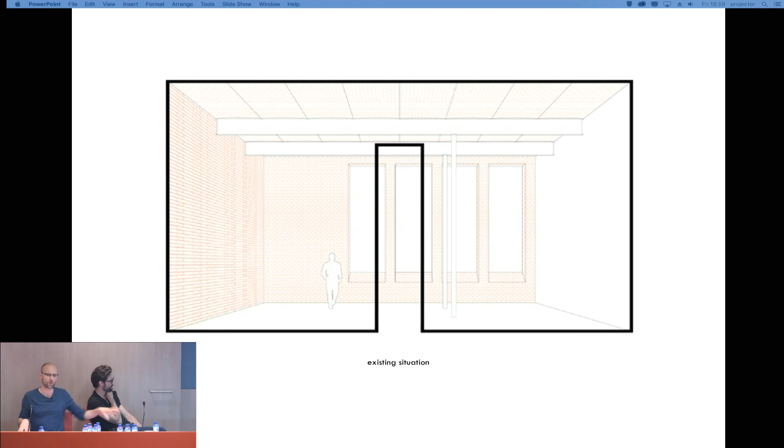That's our opinion. What we believe our job is, is to combine whatever they are asking with the qualities and downsides of this plot. So in this case, the search was how we can combine this way too complex or dense program into this loft without killing it.

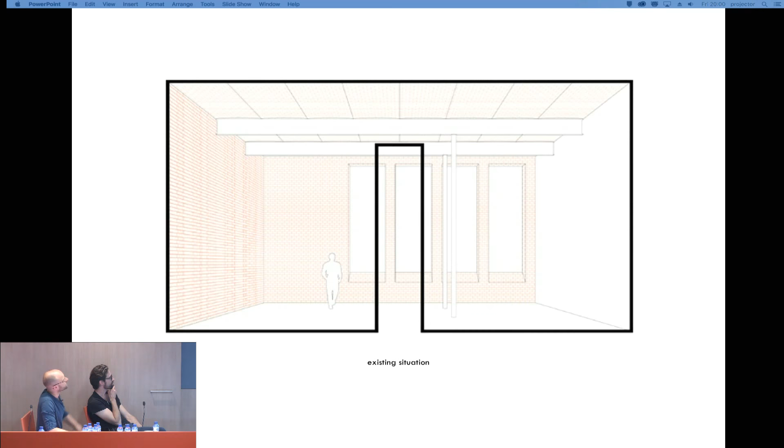So this is actually the scheme of when we were designing what we wanted to do with it. On the previous pictures you see the nice windows we have, they are only on one side. All the rest of the rooms are blind. So it's even worse than a row house. In a row house you at least have some light at the beginning and light at the back. In this case you just have light on one side.

So if you imagine the windows, this is the plan, the windows are at the bottom side. We decided to move all the closed rooms to the walls to let the light enter the open space. So we designed it as if we would design a patio woning, a patio house. Is patio English? Is it Spanish? Okay.

So this is what you actually see. What we did is we did not touch the windows. We made open space in the interior as if it were a garden or something like that. And then we pushed all the necessary closed spaces to the walls.

By doing so, we did not touch any of the columns, which would be very logical to use because we have 2 floors. Every other loft immediately used the columns, bolted some extra steel against it and used it to do the floors. We decided, no, we did not want to do it. We want to show the ceiling, we want to show the columns.

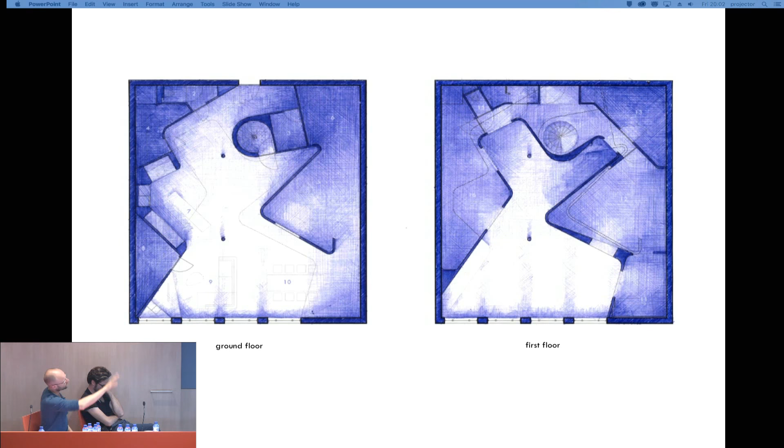And then everything else, the toilets, the kitchen, the storage is on the side. The other side you have the office, you have fitness he wanted. And then above you have on the right side the master bedroom with a bathroom, and on the left side the kids' room with another bathroom.

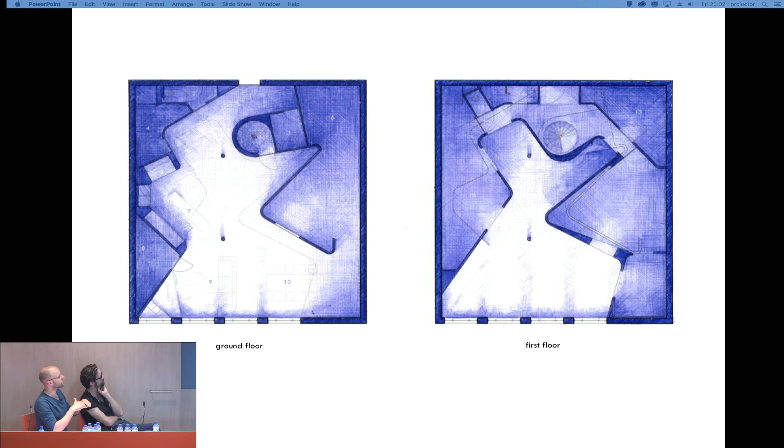So here you see on the above, the first floor is really coming together, but it's no problem because the light enters, and because of the curved walls, it's like a curtain that we put in there. The light becomes shadow, becomes light again, becomes shadow again. But you still see the old structure.

Originally, we wanted to keep all the old elements, red brick and the steel, just the steel color. But the client really loved the white, unfortunately, so he painted everything white. But luckily, we said then, okay, but then we have to find a new contrast. And then he was willing to search with us for a material we could use for the walls.

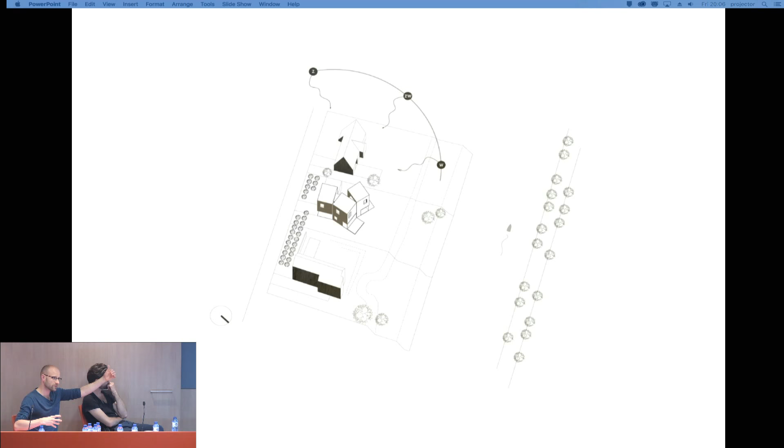The downside of this expensive plot is that the client also wanted quite a big house. So he wanted 5 bedrooms, for instance, on the first floor. But the plot is not that big. So our problem was, how do we manage this massive block of square meters? How do we break it open? And how do we let the light enter?

So again, there's a nice balance between open space and closed space. So because of the view at the back, we wanted to position as much of the living spaces to the end, to have this nice view. But the downside of this plot was also that the sun was at the left side, and the front and the left.

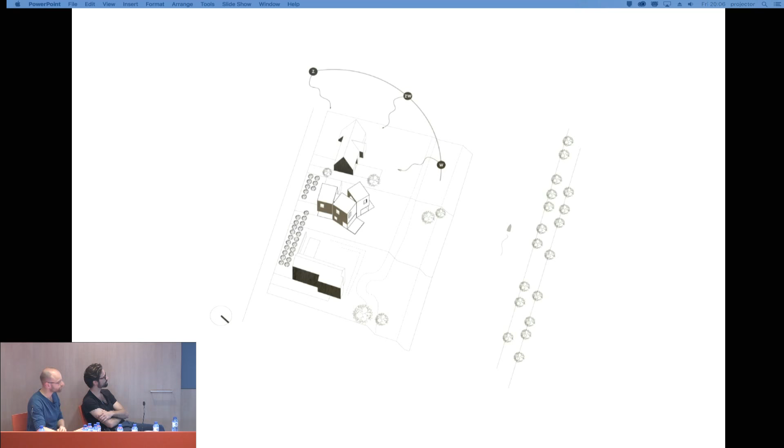So if you would be sitting at the back of the house looking towards the wetlands, and you would not have any sunlight. So what we did, we made a very monolithic volume on 3 sides.

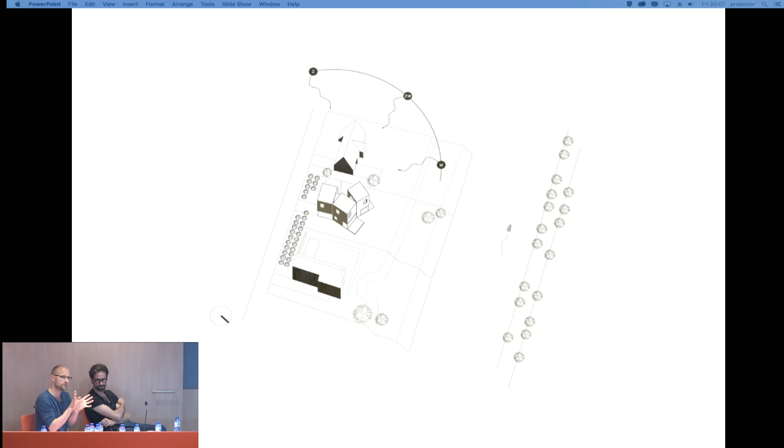Almost feels like a castle, strong, very protective for its inhabitants. But then on the other side of the house, it opens like a flower blossom would open to the sun.

So there you see on the side of the sun, you have these incisions. Again, in the previous design, it was more of a gentle gesture. Here it's been cracked open. But these cracks let the sunlight, the direct sunlight at midday, enter the house.

What we like about these kind of studies is that people see our projects without the plans. They think like, oh, if we build with Graux and Baeyens, everything's going to be crooked and everything. All walls, there's no wall will be straight or anything like that. But if we show them the plan, they understand what game we are playing.

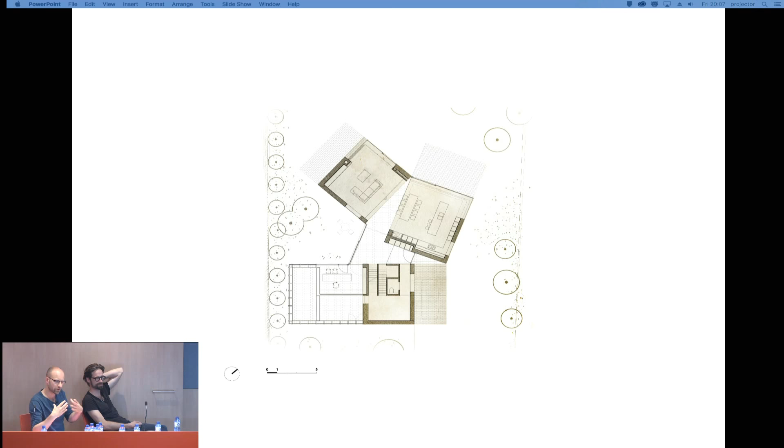All of our rooms are actually very straightforward, very logical to design, but it's only the spaces in between. It's the circulation that's been in a strange angle. So there's no problem for will the bed of my kid fit in his room? Of course it will. And will I be able to put any closets? Yes, of course. So these are the renderings from the patio on the left side.

The first image is what you would see if you enter the house and the light is coming towards you. The materialization shows that the 3 brick volumes continue to the ground. We also use the outside brick on the inside because we really wanted to feel that you are moving in between those 3 massive volumes.

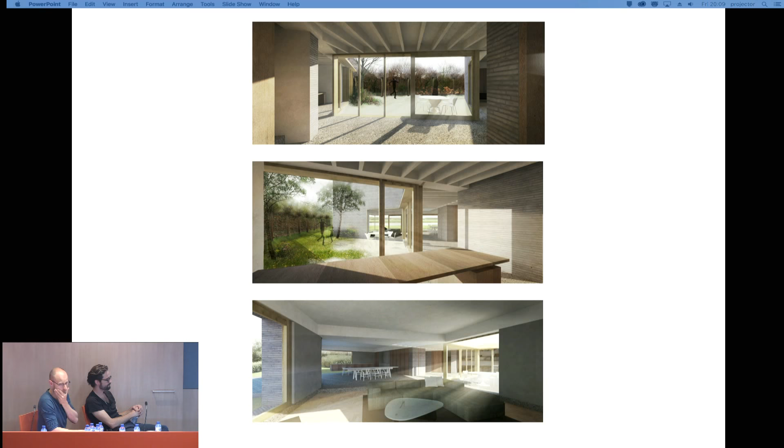But the black volume, which you'll see in the pictures, the volume that is in between, is a very light structure with a wooden structure. We also use this structure to give some sort of direction into the ceiling.

So you see the brick volume coming through down, and then the black very small volume, very light. So the front of the house is the right picture with the entrance, because the owner also wanted a place to put his car. Very closed, not giving away any of the privacy. But then the other side is really open to the landscape.

And then in these joints where the light enters, you see that there's... here you see that the light enters through a skylight, so you have your view to the back, but the light is coming from behind you.

This is just a detail of these 3 volumes. They are not actually touching each other. They are 5 centimeters apart from each other. So once every day, when the sun goes through the glass, it goes through the other glass, and then it goes through the building, and you have this really thin line.

And then Basile and I are looking, look how cool, nobody else noticed, but we are really happy with that line. But we believe that this thin line makes a difference if you are standing outside of the house, especially because it is so massive. It needs this kind of little detailing, a little bit of poetry inside.

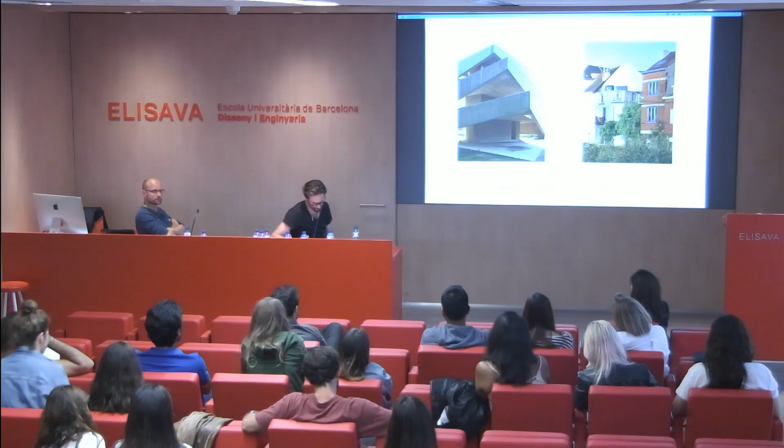Because most of the buildings we make are private buildings, and you have to be invited to go inside, it's a choice what you do with it, starting from the kind of brief you get or the kind of building you get, whether it's a new construction or not. So this is the topic, and the first project is the new one.

So here you see already a picture of this pretty expressive building. What we liked about it, what it combined for us, was that it's, in the first place, the protection. The skin is the protection for us in the first place, against everything. Then it has a concept that I will explain later. It also involves the stability of the house. What you see is actually the bearing structure of this house, and also its expression.

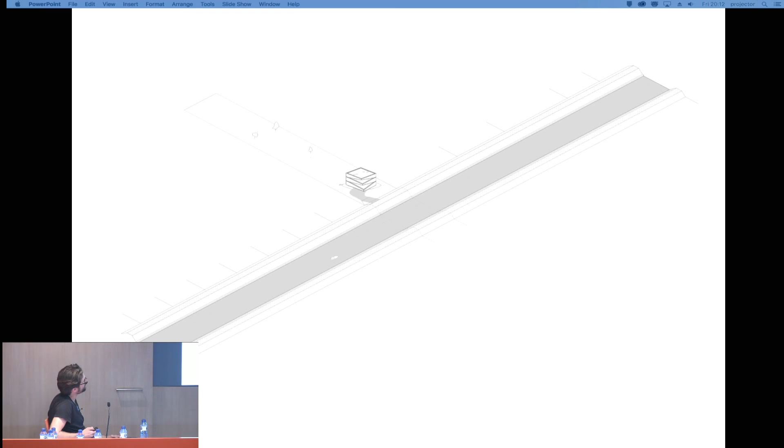So the house is located along the water, like you see. It's along a canal, straightforward. It connects two major cities in Belgium, and the plot is pretty long. The choice of building it there was not ours, it was obliged. But it was important because we wanted to obtain the views on the water and the wet fields also in front of it.

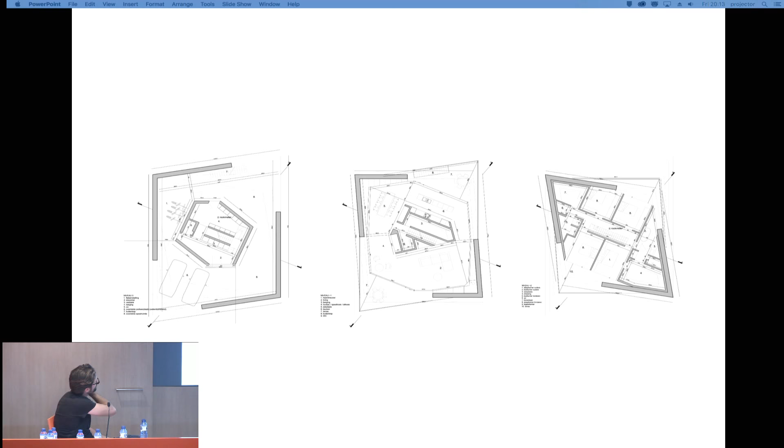The ground floor, here actually you can - it's what I told you before, but the concept is already in there. So what we wanted to do is pretty simple: you want to create vistas, to frame the views.

In the front we have the beautiful waterfronts and the fields, and on the back the trees and the garden. So how are you going to frame it and at the same time get privacy towards your neighbors? So, and the intimacy that a house needs towards the openness.

So on the first floor we have terraces, and the whole walls open up from very close in the corners, open up towards these terraces. So it's filtering the light to the more intimate parts, and the central core - that's the staircase and the practical zones - divides actually the whole rooms. This one open space gets then a bigger living space and a smaller dining space, and so forth.

On top we have a lot of bedrooms, so it's a whole different approach how we divided it.

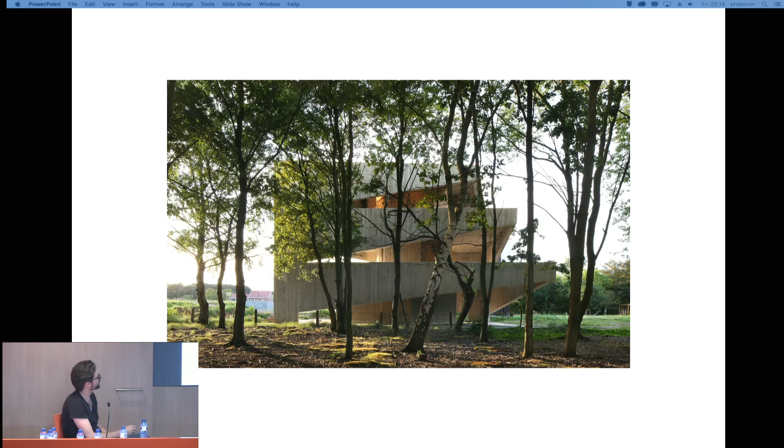Here you see how the light is getting in, and we chose already in the construction to take pictures, because there you have already the whole concept mixed. Everything is there. So there's no addition that you have to do except the windows to get your protection against the weather, but everything is already there.

The choice of using concrete was pretty obvious. It's the most effective way to make the whole structure stand. So it's a 30 centimeter wall, reinforced concrete, a lot of reinforcement. Everything is carried down to these two columns that are stacked on top of each other. I mean the building layers, and the core of the house gives the stability of it all.

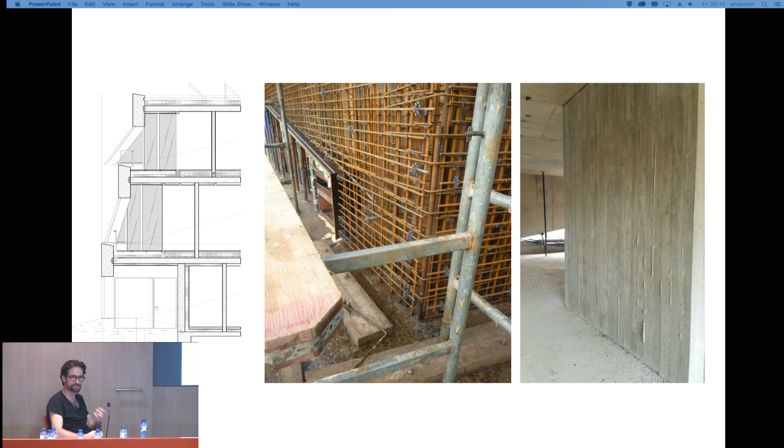We chose to work with wooden planks, that we just divided, or the position in between is just one nail. And the nail, when you pour the concrete the right way, it goes in between these planks and gives some strange, nice features like this. And when the light touches it, it really gets very tactile. So you have a really robust, strong building, but at the same time you want to touch it. It's really a tactile thing. And here in the sun, you see how the light's playing with it.

Here you already see the line of where the glass will be. I think it's here, yeah. And the division with the central core of the separate rooms inside the main plan.

This is how it looks today. Polished concrete with a little bit of sand color in it, and lime plaster also, getting a little bit more rough, so we have to insulate the whole building. The building regulations at that point are very strict in Belgium, so it's 20 centimeters of EPS that we used, and it's all plastered. But once you get the different layers on it, it's really subtle, it's different. It's not like a traditional plaster, it's more ductile, more colorful, deeper.

And here, the openness, the framing of the lights and the views. The terraces. All materials are natural materials - wood, steel, galvanized steel, really pretty rough materials.

Hopefully, normally the provisions are that in August they're gonna move, so it will be finished. It's already a project we worked on for 4 years. In the beginning we couldn't build it, it was not allowed, so we went higher and higher in the hierarchy of the city halls, and at the end it was allowed to build it. The neighbors started 2 years after us, and will finish before us, but yeah, this is how it looks.

Next project is completely different. It's a row house, actually more a corner house, 19th century building. It's a generic building. Here, all the cities in Ghent have a sort of belt around the medieval city from the 19th century, all small houses. They have like 4 or 5 typologies of houses, smaller and something bigger, but they all look like that.

Usually people are not interested in buying corner houses because they have no garden, but the reason why I bought it is this - it's a fantastic view, 200-300 meters of water in front of it. The west side is actually the old harbor of Ghent. The boatmen, old boatmen who are in pension, still live there. It's a real piece of, how you say, there's no gentrification yet in this kind of neighborhood.

It starts now, but at that time it wasn't. It was really nice to do some project there. So the fabric of the city gets really interesting because it's located on a corner. You have a small street too, which is completely different from the big views you have here.

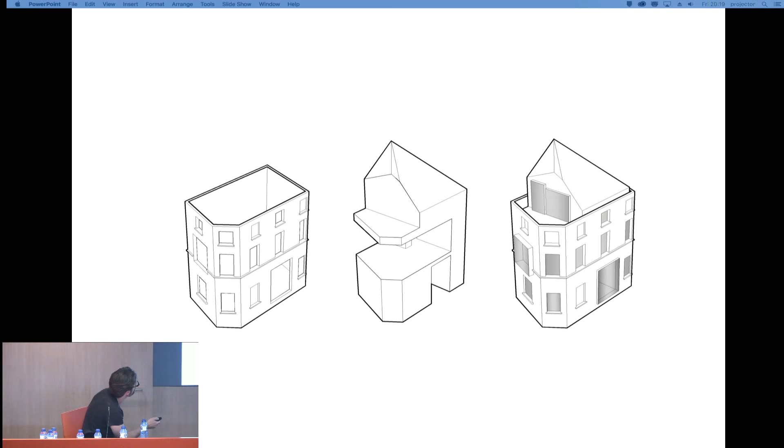So the question was, how can we play with this historical membrane we have, the skin, and do the alteration we want to do with a lot of respect for it. So the basic concept was to keep this membrane and empty it. The only thing we kept that was interesting was a staircase and the A-shaped beams in the roof. And we added new volumes, closed volumes.

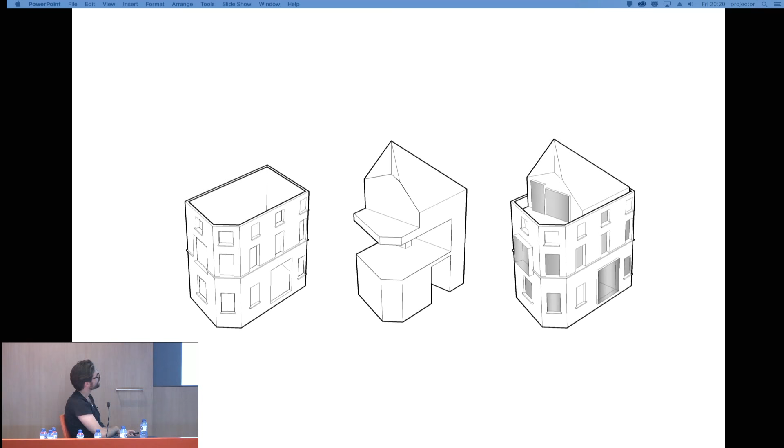And actually you have to wander through these volumes to get where you need to go, and then you stack everything together. The plan - we turned everything upside down.

Ground floor are the bedrooms - there was the least amount of light, so we kept the bedrooms there. There's also a tram passing by, so sometimes when there are 2 or 3 of them stopping, they are standing in front of it, so that's why everybody in the street has curtains, because you have 40 people watching in your living room. So by putting your living room on top, you have much more light and you don't need any curtains.

It's a beautiful view. So the living space is on the first floor with the bathroom, and then here we have the kitchen combined with a terrace.

A view from the garden of the neighbor towards the small streets, and this is one of these incisions we made. A big window, and in the front, same thing. These are the only two things we did, and the plaster just fell off during the construction.

But from the other side, you have a framed view on a sort of garden. We just received a picture today via Facebook. This was a house that was bombed in '45, the garden, and never rebuilt. When you pass there, you don't notice this garden. It's sort of a small fabric in the city, and everybody ignores it. But when you frame it, it starts to have another level to it. Something ugly can become something beautiful because you focus on it. And then all the flowers and plants are there as the seasons change, and it really becomes a picture.

Once you go up, one of these volumes blocks your view, but the light is filtering through, so it attracts you to go have a look. And that's when you turn around on the right side to enter the living room. And this is what you get: small space, not so big, but through these windows and the light, it's really pulling you there.

This canvas always worked really well. I lived there myself, and it was a fantastic place to live in. You had a lot of intimacy, because also the colors we played with, but a beautiful view on the water, and everybody had the intention to walk towards this canvas and step into it.

It's not by coincidence there's a little step towards it, because it creates a sort of dynamic, an extra—really, making the step gives you another feeling of how you get into something. And it's also used when a lot of people sit down. My son was playing here always with his toys, or you can read a book.

And then on top, also the choice of keeping this facade. A lot of people asked, why didn't you tear it down so you have a panoramic view? But that's just the whole interesting point. From here you have these old windows that frame again the same view you have, but on a different level.

And something that's not on the picture—on the left, it's a really small one, and you go look behind all the buildings that are made in Belgium. Typical: you have the main house, and then everybody builds some crappy thing on the back of it. And it's really, actually, it starts to be beautiful when you watch it.

And some shots to show what the house was like. There was the original A-shape. The terrace was—the form of the house was kept. Just by slicing one piece of it, you get an interesting terrace and an interesting visual shape of the house from the outside, but actually it's nothing special about it—it's just slicing one piece of it.

Kitchen block, a bathroom, and the two bedrooms. My son's bedroom was really small, 7 square meters, but he always used the entrance room as a sort of extra room to play. So the entrance, the hallway, is becoming more than just a practical thing.

Then the two next projects are titled Strangeness versus Familiarity.

These projects are really similar for us, although they look very different. The left one is new construction again, and the right one is a reconversion or refurbishment with extension.

The client's brief was really interesting. He said, I want a normal house, nothing special, except that I want all the places, all the functions to be separated, but still together. We didn't quite get what he meant at first. How are you going to do that? Either you work in an open space like a loft, or you work everything separate with doors like they did before. So that triggered us to think about what we could do.

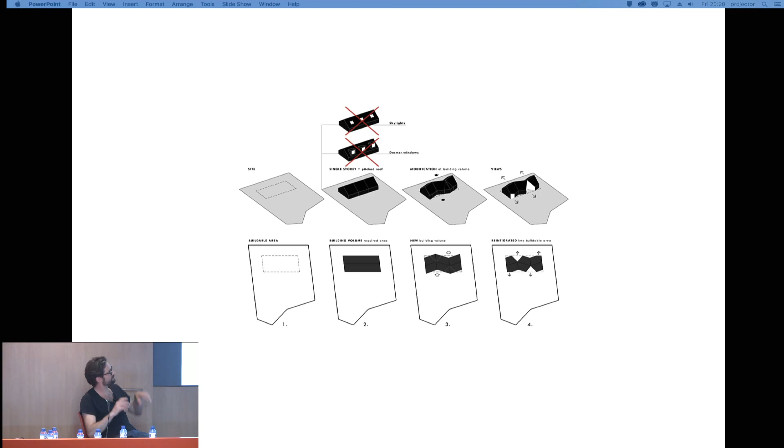So the challenge was how to get all these separate, open rooms and still bring in light without the traditional way of doing it. We thought a lot about this, and the idea came when we started to fold it a little bit, and especially when we made two incisions on both sides of the facade, letting light come into the whole building. This is actually the frame, the backbone of the house.

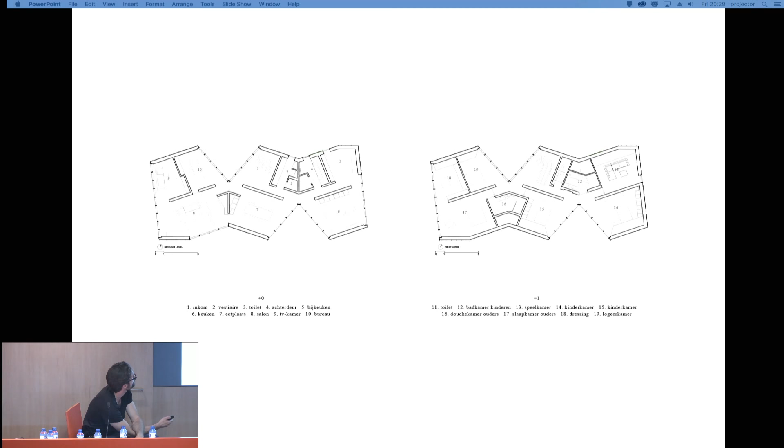We're really proud of this plan because it incorporates a lot of what we do. All the rooms are actually completely separate from each other, but through these openings you get a diagonal view from one side of the house to the other, left to right, internally too. Every room can be separated by sliding doors that disappear, but it's very dynamic. This is the reality of the plan.

By making a symmetrical building, you actually have no back and no front, but the environment is different. So the interaction between your environment and your building is completely different, even though the facades are the same.

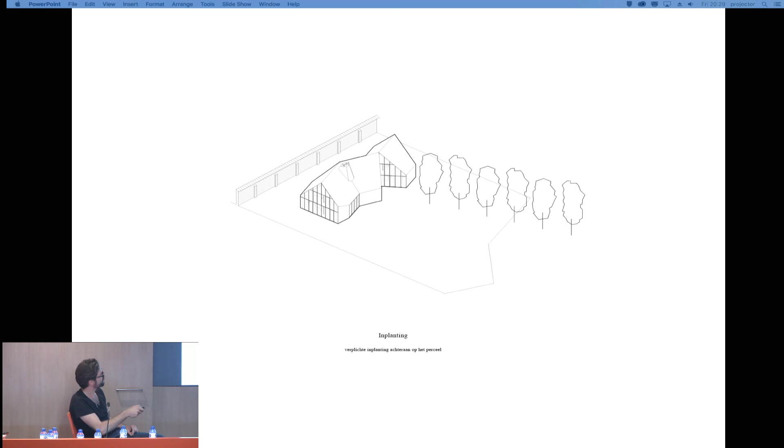The building was obliged to be built at the back, and we couldn't make any hole in the wall facing the street, so we had to enter from the front, but then decided to place the entrance at the back instead. Here's a picture of what we couldn't do.

It actually looks like a really modern building with modern materials, but on the other hand it's really familiar because it's based on the archetype we all know.

It's really hard to photograph. We seem to make architecture that's really difficult to capture in photos. Like most architecture or interior architecture, you really have to be there to feel it.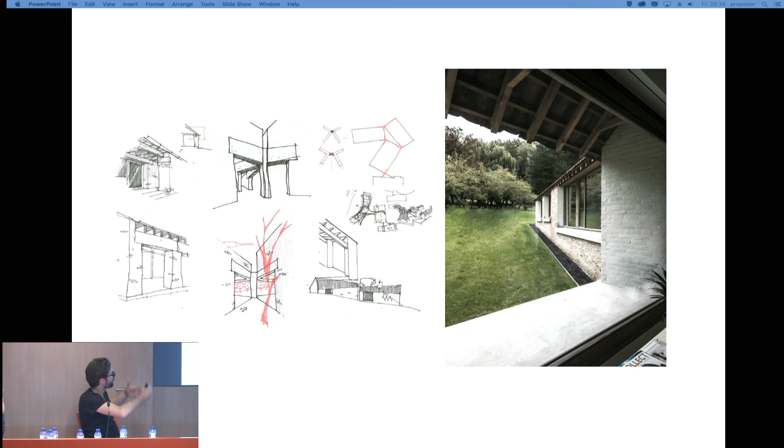Possibilities of how to connect everything to each other, sort of a patio, how two buildings do not touch, like the 5 centimeters Koen talked about, but then more, and how it's going to be supported. So these were all the ingredients we played with.

And this was the final organigram, how you'd say it. So we have an eating house, a sleeping house, and a day house. But what's most important is what happens in between the volumes, not what's happening there, because this is a cluster of buildings. That idea of clustering and adding more, it's like making a little village.

But in between these houses are squares. Sometimes you can make a garden feeling like it was here. We didn't touch anything, there was no real design of the garden necessary.

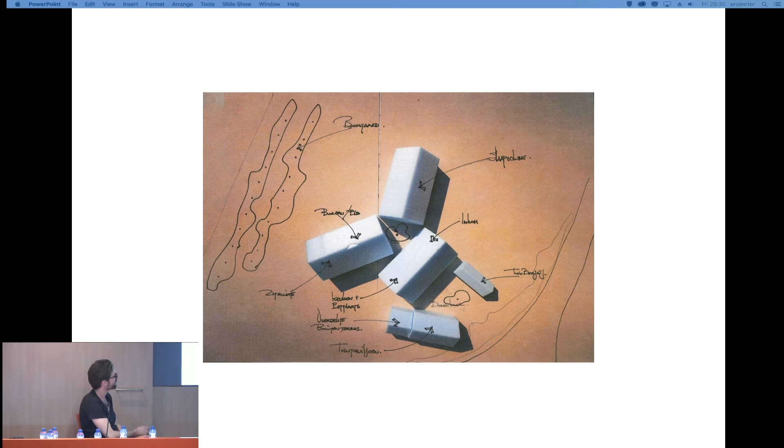Here it's going to be more, it's a south. We designed something to it, sort of big terraces, and this is more like the old farm felt. Just the only thing it needed was one tree in the middle, and it worked perfectly.

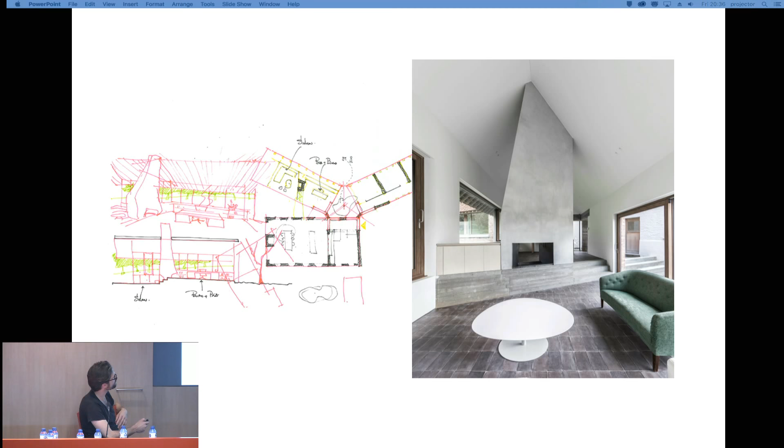And there's the connection between the eating, the former house with this, and the bedrooms. This is the former house, or the eating house we call it, with the A-shaped beams, the original ones.

And all the materials we use refer to this - it's a Spanish floor. All the tiles are really different, they go from 29 centimeters to 31 centimeters. So they all had to be selected so that the rows could be made without having one sticking out over the other.

And the final plan, the technical plan, with here the result of it.

So first, people and friends and architects asked us when they saw that, are you changing style? Are you doing something else, old buildings or something? But for us, this is as contemporary as the one before. It's not the materials that determine if something is contemporary, it's the way you play with light, with the rooms, with the interaction of rooms.

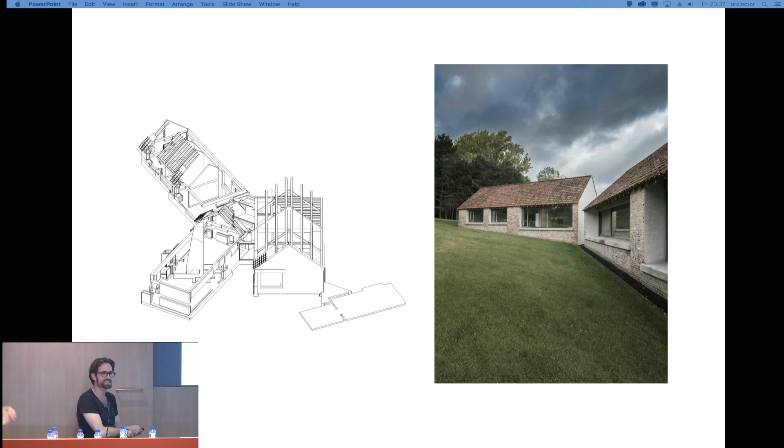We made some 3D technical drawings, so we have no cold bridges and stuff like that, so it was really complex to make something look simple. We always compare it with dancing - when it looks easy to dance, it must be very difficult.

These next two projects are two new houses we are doing in the city tissue. Things are changing a bit for the moment in Belgium because they are changing the laws and trying to stop new lands being developed. There will be a concrete stop, as they call it, in 2040, which means all the nice plots for nice houses are finished. We don't mind it because, as they say, Belgium is already fully built, and it's quite true.

But the interesting part is that now people are looking towards all the leftover places in the cities to build a house. So you get these really strange plots where nobody else before thought of putting a house, now being sold as plots to build on. What we like about that is that you really have to be creative to use these shitty plots and make something really cool out of it.

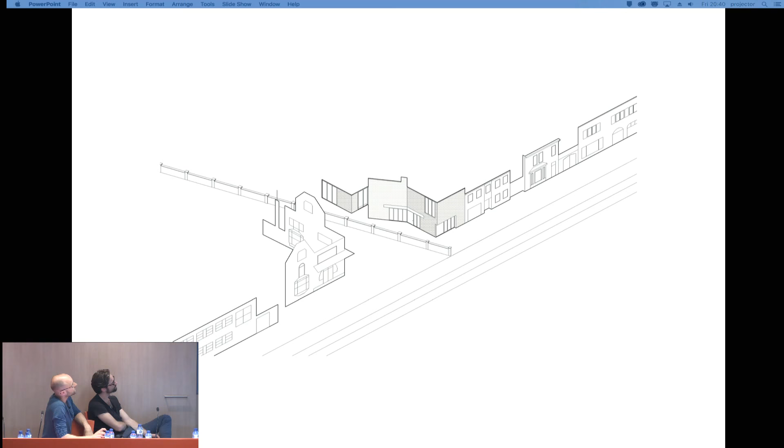So we had to come up with a design. We found it important to give an answer to this very strange situation. We did not want to make yet another row house. We wanted to make a facade that could continue what's happening in between those two buildings.

So what we decided to do was, since it's all one facade next to another, continue this story and pull it inwards into our plot. Like that, we made a sort of dialogue with the other house standing next to it.

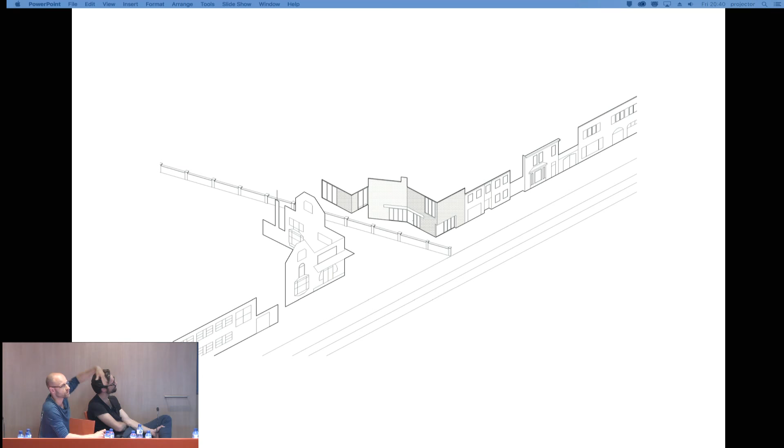A very important reason for us to make this kind of architecture was also the sunlight. The sunlight was at the side of the house and at the back of the house, so we needed this facade to put in the windows.

So here you actually feel the narrowness. We only have 3 meters between our building and the wall dividing the two plots. But this wall, which is an old element, we really appreciate it. For us, it doesn't have to be something modern in aluminium or black or whatever, we can appreciate this kind of wall.

Especially if you combine it with the curtain again we made in brick, something cool is happening. 3 meters is really too narrow to put a wall next to another wall, but because of the tilted movement we made, something interesting starts to happen.

Again, all the crooked lines are very logical once you see the plan, because what we are doing is connecting 3 identical square volumes, connecting them at the corners and breaking open the volume like that.

So in the first volume we have the office of the client, who is a landscape architect. Here is his office, this is the dining room, this is the living room, and here is the kitchen. And then this V shape is again a patio to put a tree and let the light in.

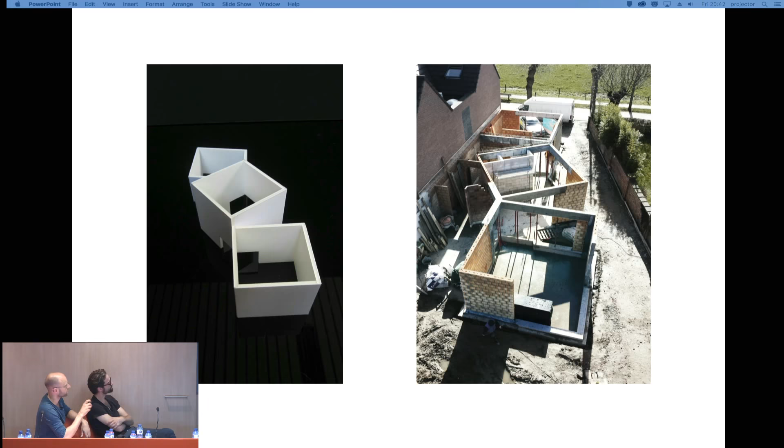This other triangular shape is where we put the staircase going to the top. So you almost have no hall or anything like that in this house, because all the rooms are connected at the corners. It was quite similar in the copper house, you immediately go from one room to another.

At the outside of the house, we wanted to make it really clear, the 3 volumes. We chose the last volume, this one, where the living area is. Here is the patio in between those 2 volumes. And then those 2 front volumes, we decided to make an accent out of it, make it more readable.

Thanks to this movement we made, it was possible to put in windows that are no longer facing immediately the corner, but they look away from the next neighbor. So here you see the plan.

On the right, it's a study of what we wanted to do with the connection of those 3 volumes, because here where they are connected and here where they are connected, you wanted to move through, but we really wanted to make it visible what we were doing with the architecture. So we designed 2 concrete elements.

Here you can see them. This is the concrete element on the left side when you are standing in the night hall, looking to the front door, and you see this concrete element that's actually also a load-bearing element for what is on top of it. Then the other connection is here, connecting this place, the living area, the kitchen is here, and on the right you have the dining room, and this is the glass of the patio where I'm standing next to.

So here there's also a window which gives some light in the night hall, but we didn't want some glass there because it's only facing the neighbor.

It took us quite some study to make this design, because it can't actually be built. The first one we drew was very similar to it, but we got a phone call from the guy who was doing it, and he said it can't be done. And actually, when he showed us on the construction site what we built, there was no more space to put the bricks, and so we had to really study that it would not fall apart and still was strong enough to remain, but it's still standing.

This other house - this is not the house, it's the plot next to it. This is again in the city of Ghent, an example of a plot that was never building ground. It was the garden of the house next to it. So this wall has been here for probably 30 years. Now the owners of the right plot decided to sell a piece of the plot. So this house, the garden is from that house, and this is what we built next to it. It's a new family house in the city of Ghent.

We found it really important not to make some closed facade. We think it's nice if you can open up to the city, especially because the direct sunlight is at the front of the house. So at the first floor, here we have the kitchen. Here is the living area, and we wanted the terrace on the front side, on the sunny side. This is the bathroom - you don't need a terrace there, but it was nice in the design, and it's practical to clean your windows.

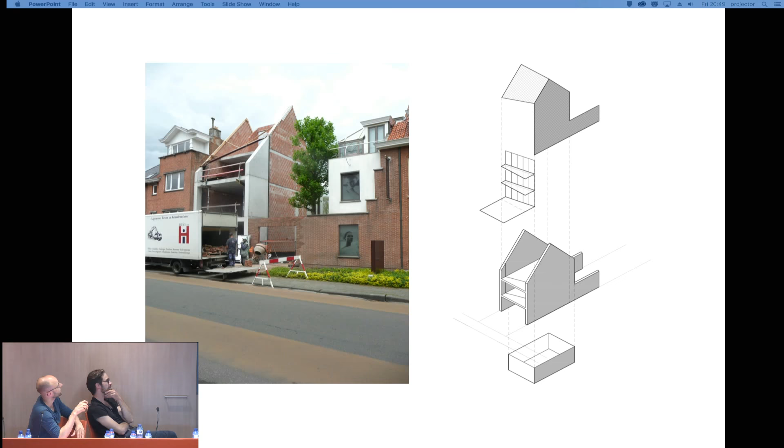What we like about this concrete is that it's honest. The structure is what it is. It looks like it is. It does not need anything more. It's just been polished on the surface, so it's good to use.

So this is the ground plan. You see what we did - again, every floor has the same tilted glass view. At the back we did the same with the window, repeated, and at the back again. In the beginning we used exact lines here to create the staircase, again a triangle shape, because on one hand we needed the space to put in the stair, but on the other hand we wanted to be as close as possible to make a connection between the front space, the kitchen, and the back space, the living room.

So here you see the concrete staircase going all the way up and making a connection from the living room through this void to the room at the back.

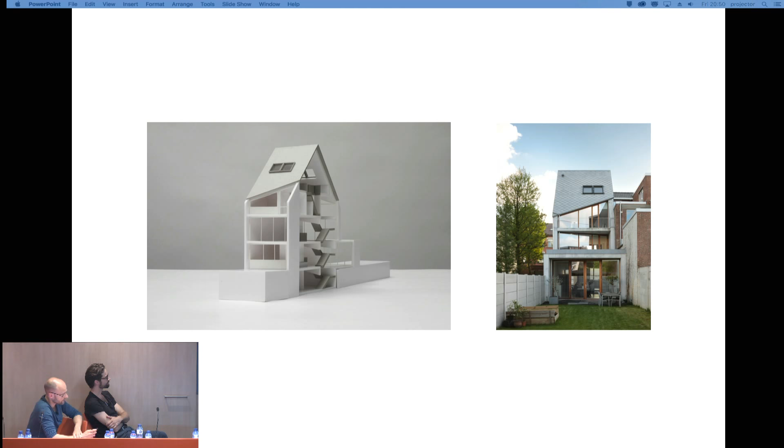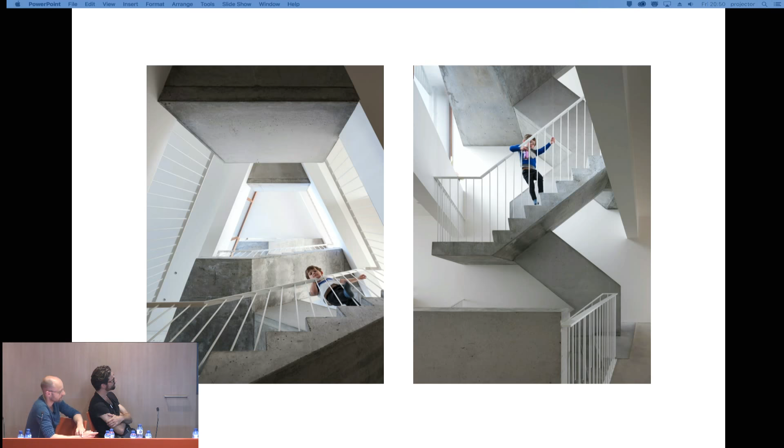So here you see the back of the house - the right picture is identical to the front of the house. We've used this concrete element at the front and at the back, and then we decided to make this really raw, strong element, the staircase, in the center of the house, because it combines very well with the softer touches of the rest of the interior. That's what we really like - if you have this robust structural element and combine it with some gentle materials, you get a nice combination which makes it more difficult to make it too modern, or to get bored with it after two years.

Then those two last projects are two reconversions. What we like to show you with those projects is how we decide sometimes, although the clients ask us to demolish something, that we try and look for the qualities in the existing situation. So again, a typical Flemish, really old house. Obviously the client's request was to demolish it, especially the two small houses, get rid of it, and give them something modern with a lot of glass.

When we went to visit the site and drove back to the office, we both had the same feeling that we really liked the two little houses for some reason. It's really charming, it fits really well in the environment, and there are more buildings like that in the surroundings. So we thought, couldn't we keep that in some way?

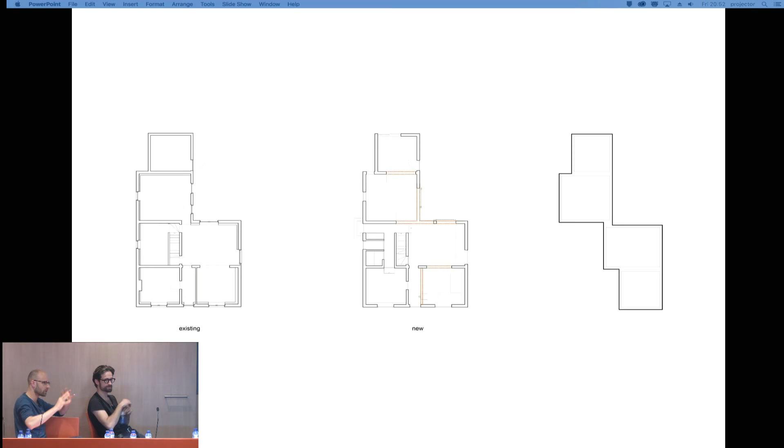Especially when we started to look at the plan - this is the existing situation on the left side. The orientation is that this terrace is actually very good for the sun and the wind. So what we saw in this plan is that all the rooms we needed were already there: a nice little nook for watching television, a living area, the kitchen, and a dining table. And also the terrace where it was needed was already in that plan. This gave us another reason to decide that what we liked in the first place, those little charming sheds, combined with the plan, meant we did not want to demolish it.

The only thing it needed, in our opinion, was some sliding doors in the ground plan to let in the glass and the light. So the right side is actually the scheme we showed to the client, because this is something we really like and do in a lot of our projects - it doesn't have to be one open space. If there's one space here and another space there, connected only through a small corner, we like it.

So this is what we did - we put in this glass, and for us that was already enough to make the whole ground floor work. Here you see the connection between the front and the back. We chose not to use concrete this time, but wooden beams. There's a column here also in the same wood, in the same sections, and so the glass could be glass and glass without a structure in the corner.

What we like about this is that the way you look at the existing situation can also mean you decide to keep more than you would expect. Of course, there are some other issues that have to be solved in this project.

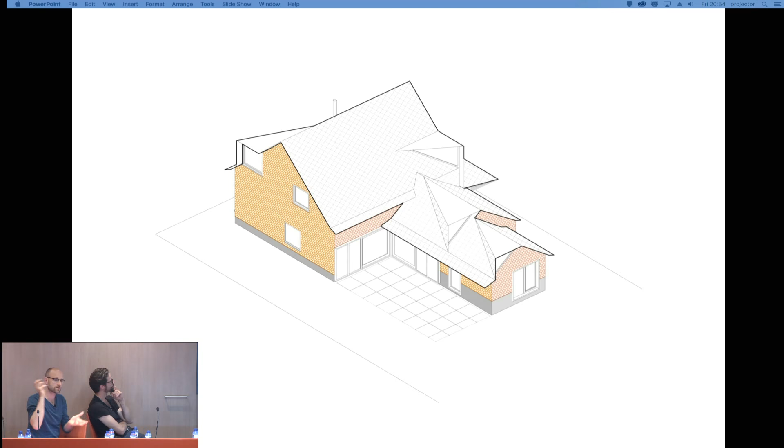There's not enough light in this old house. So we decided to take this element of the roof and start designing on that part. The combination of a quite modern roof with a really classic structure underneath gives it this little twist.

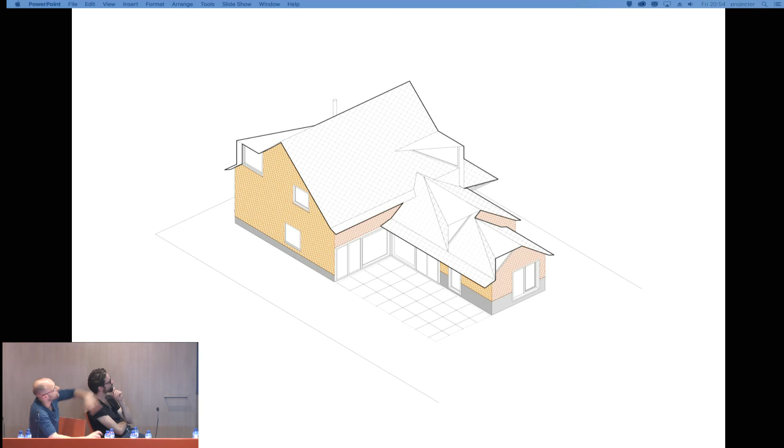There was a room at the front that needed a window, there it is. There was a bathroom at the back that needed a window, so that's over there. The two rooms here we actually kept, we didn't create them. We wanted to give it morning light because of the dining room and the kitchen, so we designed those two elements.

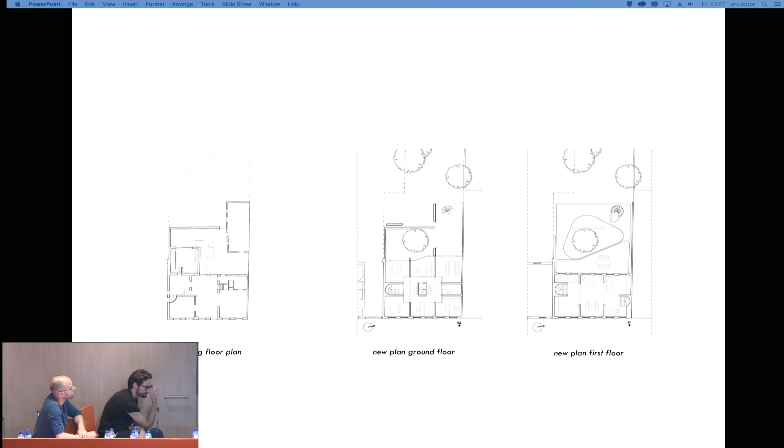So this is a ground plan. Thanks to this very logical division, you get an entrance here in the middle and 5 rooms for the psychologists around it. Then at the first floor, again, we play with the back.

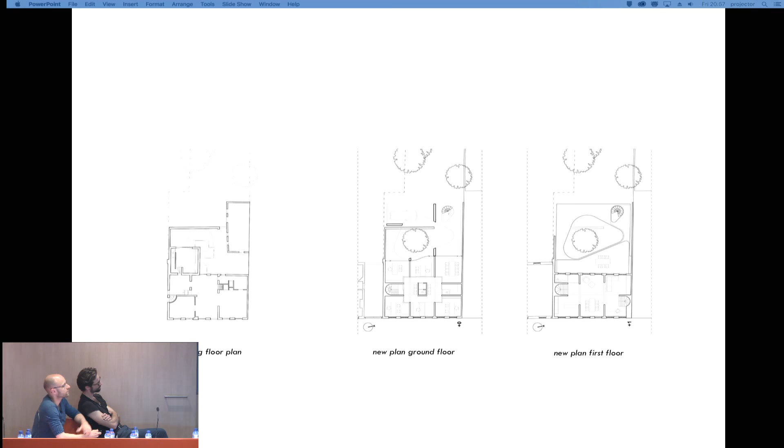The front facade has been repeated at the back, although it was completely demolished. There were no windows there whatsoever. We decided to make it identical and then introduce these beams and these 2 round staircases to make it more of a classical plan.

So this is the ground floor. You see 2 entrance doors through the practices for the psychologists. You also see the newly introduced beams here, which give some sort of division.

What we like in this project is that it's no longer visible what is the reconversion and what is the new element. That's why we love to do both projects, because you get this crossover. Well, everything you see is new.

Then at the back of the house again, so the first thing we did is make the original house more classical, so it was very at ease. But there was still a problem at the back of the house.

At the first floor you have this practice, and you have this family house. The practice is here, and there's quite a big garden behind it. And we wanted to give the garden at the first floor.

But what I mean by this is that's actually what we did in this project. So we were trying to find a way, and it really took us quite some time, to connect this house to this garden while respecting the privacy of those practice rooms.

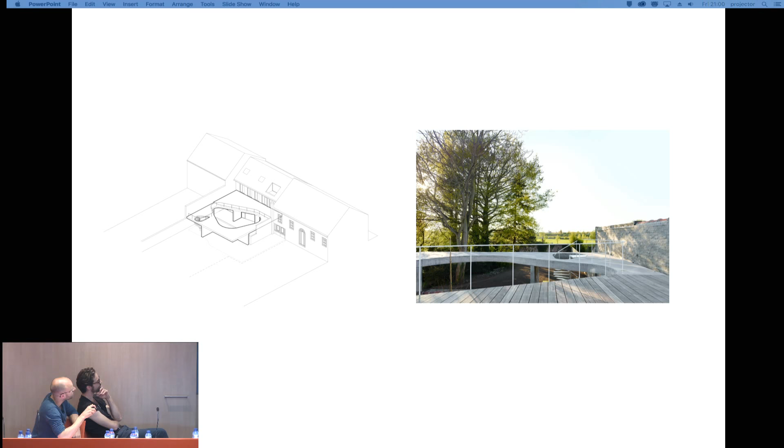So what we chose to do is keep this old wall, which was quite charming, and we put this gigantic concrete element on top of it. So we were happy that we could use concrete again. And it looks like this.

So here, the first exterior space is the patio that's connected to the psychology practices. This is the other side, the private garden. This is a place where you can put your car. This is the staircase to go up. And with this element, you see that the terrace, the private terrace, and the offices respect each other's privacy.

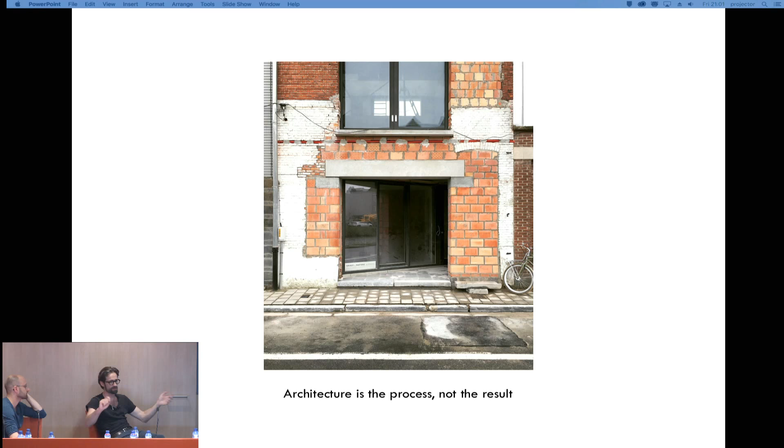Last topic is actually what we are working on at this moment. I'm going to show you 5 projects, but just shortly, something quick about each. These are on the drawing table, or we're working with the engineer on, or starting to be built. So we took everything that was hanging on the wall, or a few of them, to show you what we were working on.

So the first project is a small project, a new construction. Again typical for Belgium, a lot of green, but when we came to the plot we only saw houses. You see houses everywhere, and the green, the gardens, the landscape is behind it. The plot is 400 square meters, which is quite small, and our neighbors are really close, and this is a farm, so the only views we could get are here, and if we would live on the ground floor, that was the only thing we could have.

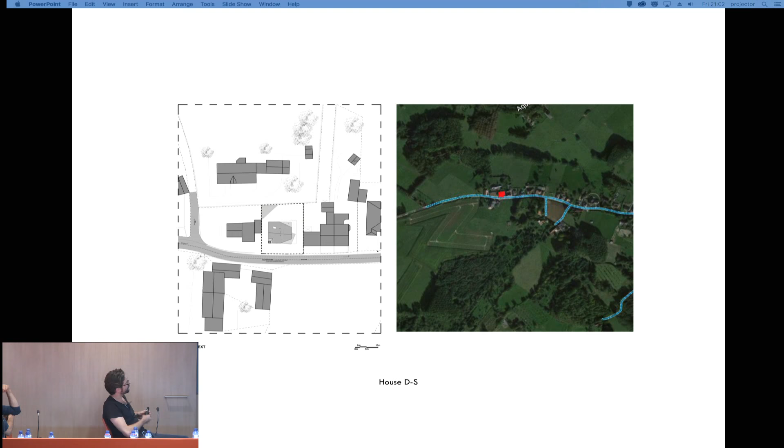So the idea was to make a square, small house, 180 square meters. For Belgium's normal standards, it's pretty small. And it's on a small hill, so underneath, on the ground floor, this is how it looked like. Again, a chimney.

The sketches that we present in the beginning for the clients. And here you already see the living area will be here, and the sleeping area entrance is here, half in the ground, half on ground level. This is concrete, and this is slabs, slates.

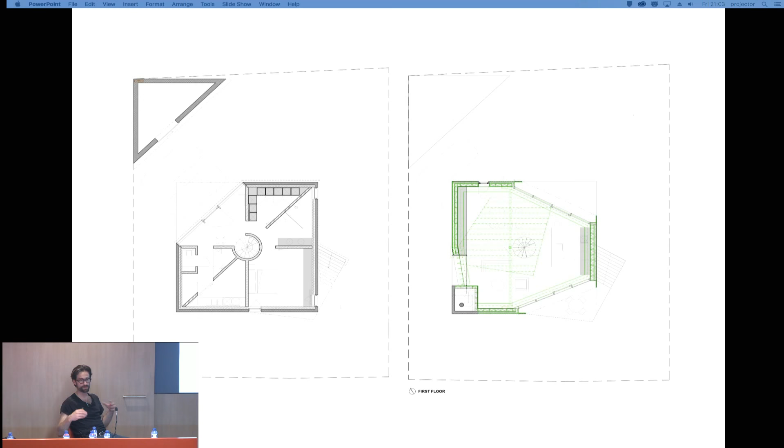The square plan, we only cut off a part of it to accentuate the entrance, to cover it. And so the darkest spaces are for the most intimate moments. And here we have a wooden structure. Everything that will be wood will be visible. That will be the aesthetic of the house.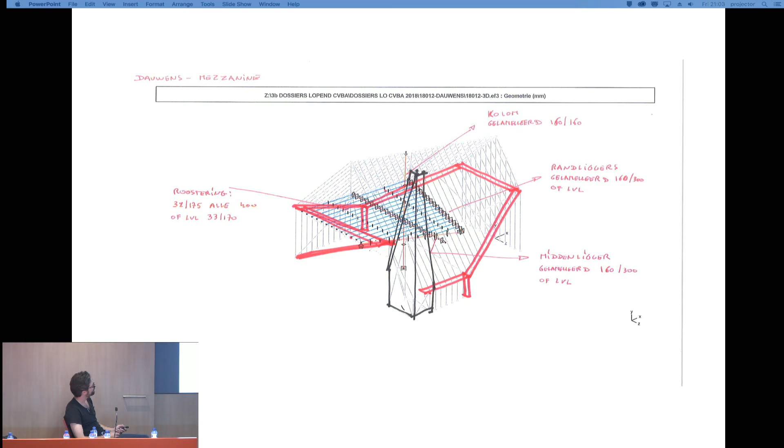So we are now working together with the engineer. Look, there are really big laminated beams that go from one side to another, to have the whole support of it. And then the other ones here, everything will be visible. So we love to play with structure and aesthetic that work together.

Next one, House BS. It's located also in the countryside, in a really small village. A few houses, beautiful views on the back and here.

What's interesting about this project is when they came to us, they wanted to have a house where they could die. What they mean by that is they are 60 years old and they want to live there for the rest of their life. They don't want to go to a home. So they also added that they wanted to have another house incorporated, sort of a guest house for free, for a small family to live there and maintain the garden. The garden would be for them, they would live on the first floor, and if they would be too old, the family would just go buy groceries for them and go to the pharmacy. Sort of a deal, free living for some help. So we find it quite interesting.

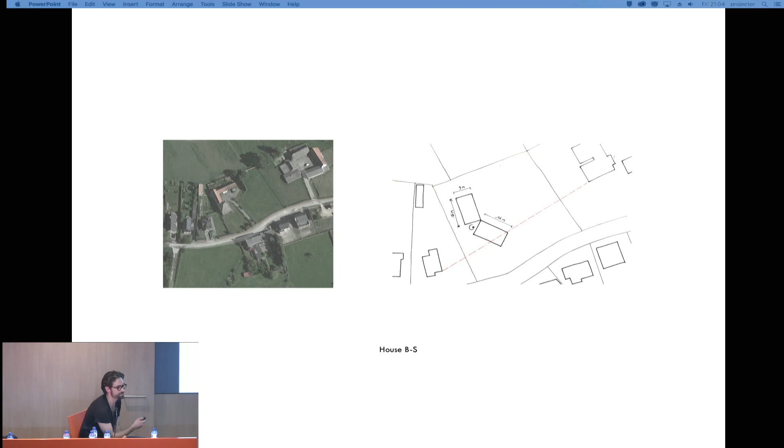So the choice to live on the top was made by them. But here we see that we choose to tear this down, and here the house will be put, so that maybe in the future this could be divided for another family to have a house. Not being selfish and putting this one in the middle.

These were the first sketches and the model that was made from the sketch. We felt like, okay, we come to this building, underneath you can park, central you have the circulation, night parts, day parts, and underneath also the guest house with a lot of terrace around it. Start playing with that. These are some of the models, some with pitched roof, others with flats. We talked about Juliaan Lampens before, a concrete master architect we really love, a 90-year-old architect, was one of the inspirations.

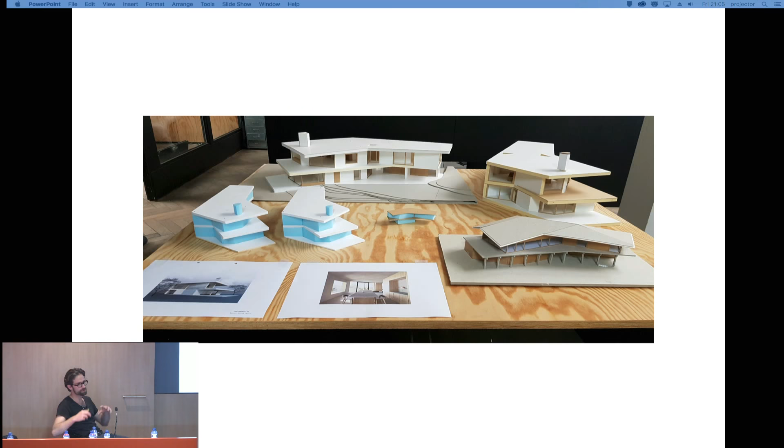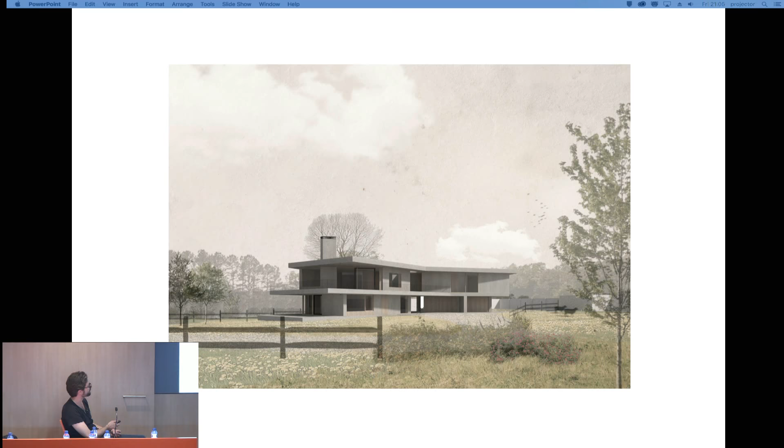But we make different models, 3Ds, just to test everything. That's what Koen already told you. We always use every media we have to test what we're doing. Isometry, and then the renders we made to give the physical aspect to it.

Now also, the study of the engineer is finished, or practically finished, so hopefully we can start building it in 6 or 5 months.

The other one, the third, is a church, like you see. It's a church that was restored 3 years ago completely and burned down 3 months after it. So they didn't know what to do with it. Maybe it's not here, but in Belgium we don't have a lot of people going to church anymore.

So they reconverted to restaurants, dancing, skate parks, whatever. But because it's a really small village, it meant a lot. All these families had been married there, buried, baptized. So for the local people, it didn't feel right to do it. So they thought rebuilding is maybe too expensive and it's too big for this.

And then it started to become a competition, because the city hall here in front of the square already had, for a few years, not enough room. So they had some offices and apartments around it. So they decided, can we do something together? Make the city hall partly in the church, together with the church. What we found very interesting.

So they made an international competition about it, and everybody could enter. There was a selection of, I think, 10 offices and then 5, and we participated and we won this project. So that's the first competition in a long time we participated in, and certainly an international one.

I'm going to be really brief about it because it has a big story, but what we did was in these inner walls, again the skin, we added 2 volumes. The only brief, one of the only instructions they had, is there should be a separation, a physical barrier, a wall in between the both of them, because actually it's water and fire in the same building. Normally a church and the city hall are not really fond of each other, but it made it more interesting.

And we put a 3rd volume here, a sort of canopy, a connection between this new addition of the city hall and the old one, so there is a connection.

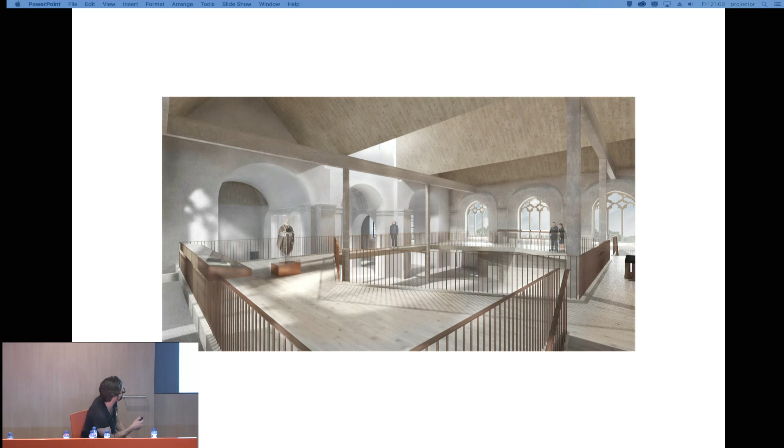And this restores actually this balance. It works really well, but it has different layers to it. It also needs to be for concerts, so here you have the choir, the singing people, and the organ should be here. And it was also used for exhibitions and for concerts, so people, I think you can have like 500 or 600 people for a classical concert.

This is the front part. We stacked several layers. It's really compact, really dense, but by making patios here and there, we do not touch the wall, the existing wall, as much as we want.

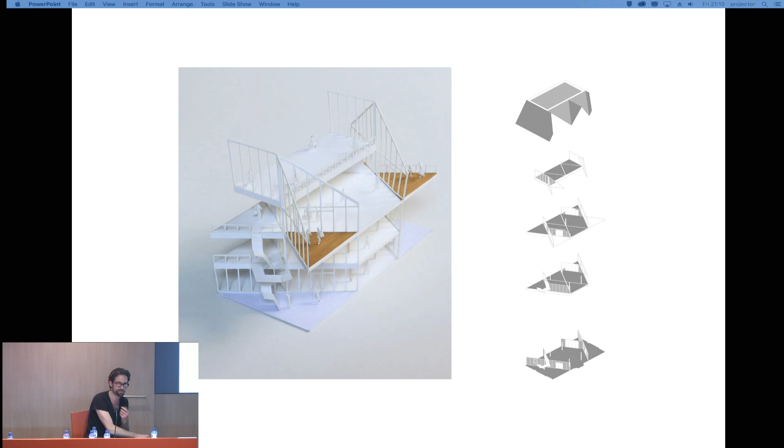We didn't want to touch this wall because it has a lot of patina, a lot of history. It burned down, and this whole burning texture that's on the wall, we wanted to keep it as much as possible.

What's interesting is this is a typical roof you would see on this kind of church, but by making these incisions here and there, the patios have a lot of light going through. It also refers to the situation today - there is no roof, there's nothing anymore, just the outside walls. So it's a sort of reminiscence about how it looks today.

This is an artist studio, Steve de Smet. This was his brief: imperfect, honest, modest, and humble. Big texts, but still we have to start drawing.

We created a center volume, an honest volume, because everything we were building with, you will see it. It's symmetrical, it's huge, because it will be needed for big sculptures that we will make. So it has a big scale.

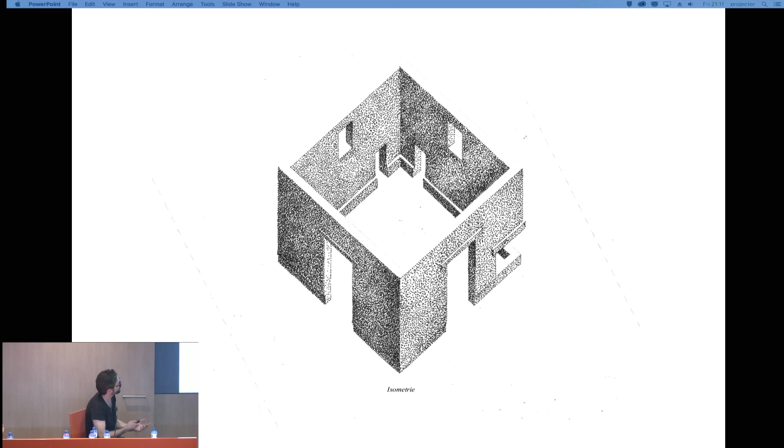We introduced here a bench and a smaller window. When you stand up, it comes a little bit too low for your vision, so the first feeling you have is to bend over to see what's behind it. By creating this bench, you want to sit down immediately, and it's in another, more intimate scale compared to the bigness of this square.

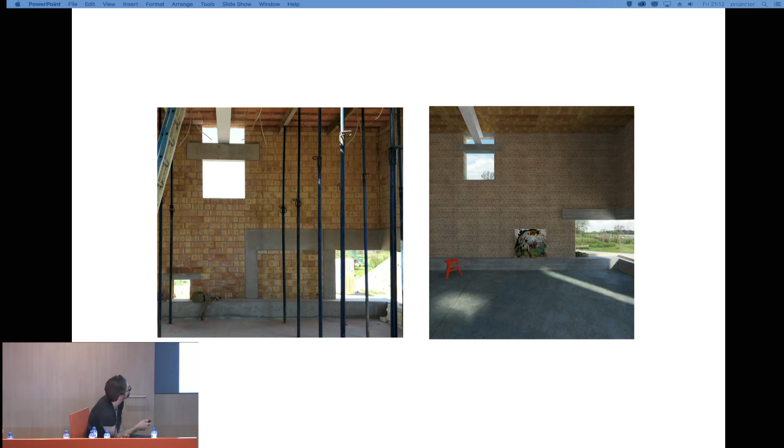A render that we made in the beginning and how it looks today. This is the bench that I mean, and the window.

Around this square we have a study room and kitchen and a sort of perimeter wall around it. The model.

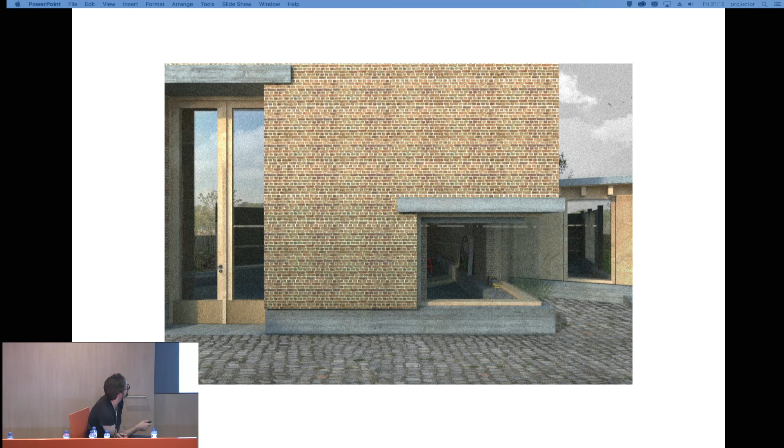And again here the corner window with the big doors so they can bring in these sculptures and the light can penetrate. And last one, House T.

It's a typical suburb like you would see in America also, big streets, a lot of trees and big houses. Our plot is this, all these trees, actually half of it. We love these trees when we saw it. We thought, why not build a house there?

Usually when you get this kind of assignment, the building regulations allow you to put one big block, so it didn't feel right for us. So the idea was to sort of scatter the building over the totality of the plot. We made three separate geometrical volumes, some small scale, and then we gradually worked it out.

So the front of it, you enter here. This is a music studio, and in the basement you have the mixing studio. He likes to play music in a band. The living area with terrace - it's a quarter of a circle.

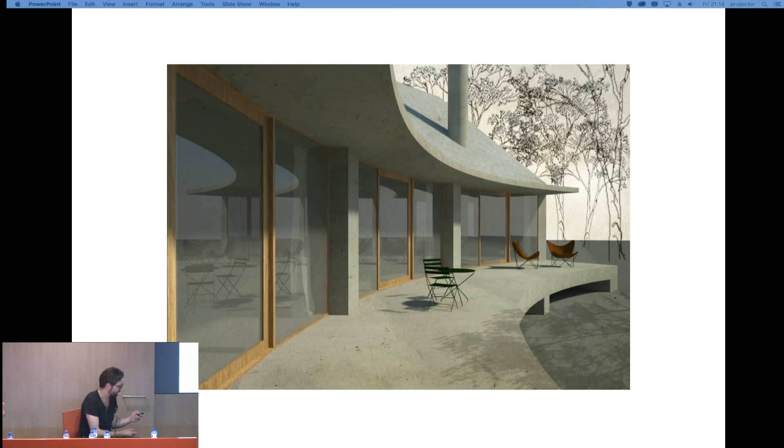It's to create more distance toward the neighbors. You orientate yourself towards the house, the sun. And on the back, the sleeping areas. A few renders - we wanted to lift the whole building up so that the trees could still grow and the roots could go under the building.

And this is the entrance. In between the intersection, we get to the entrance. Some details we worked on.

Everywhere there are some sketches. Okay, if you have to make a gutter, how we're going to make it. This is actually the tip point of a paper plane, where you can bend it again. It's some small stuff we like to work on.

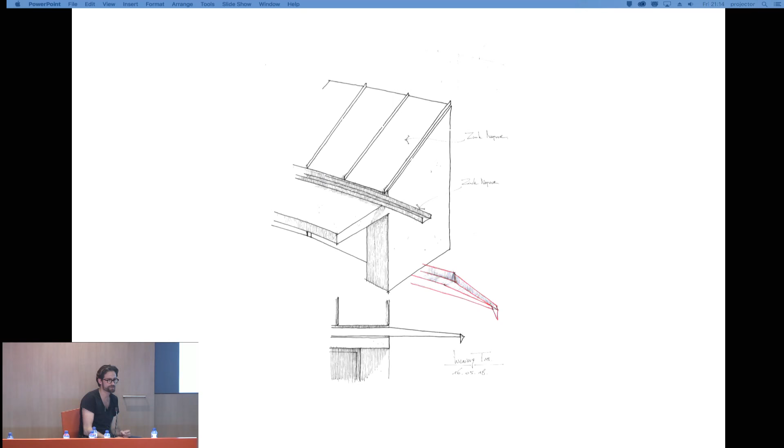For us, this is as important as the bigger movements we make - the details about it. Every layer of the process is actually important. Voilà, thank you very much for your attention.

Is that right? Yeah. Well, I mean, I think you proved that totally right. The old houses you showed us were actually something you would say there is nothing to do about it - you just tear them down and do something on your own.

But you didn't. So for you, you took this as a challenge, and did really nice architecture. So probably it's true - you can do anything if you really want to, and then there is no bad architecture. Somebody else would have done something else, which is also legitimate, and so there's a whole range of possibilities.